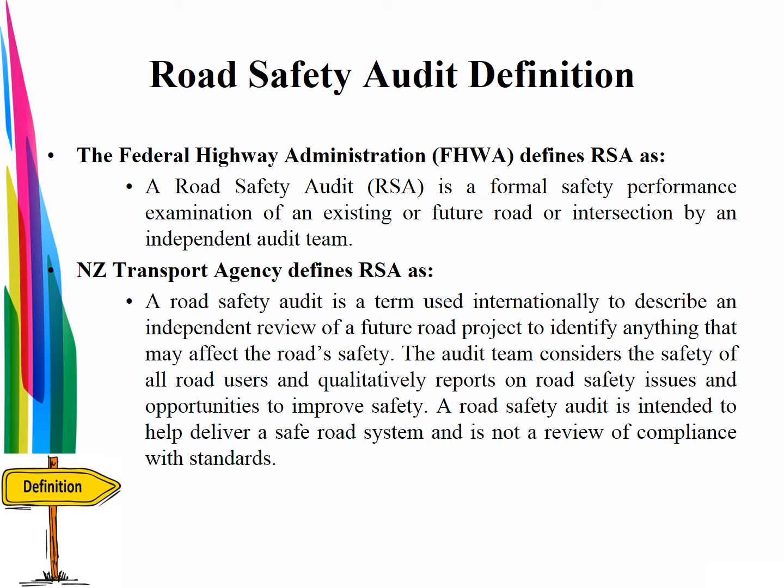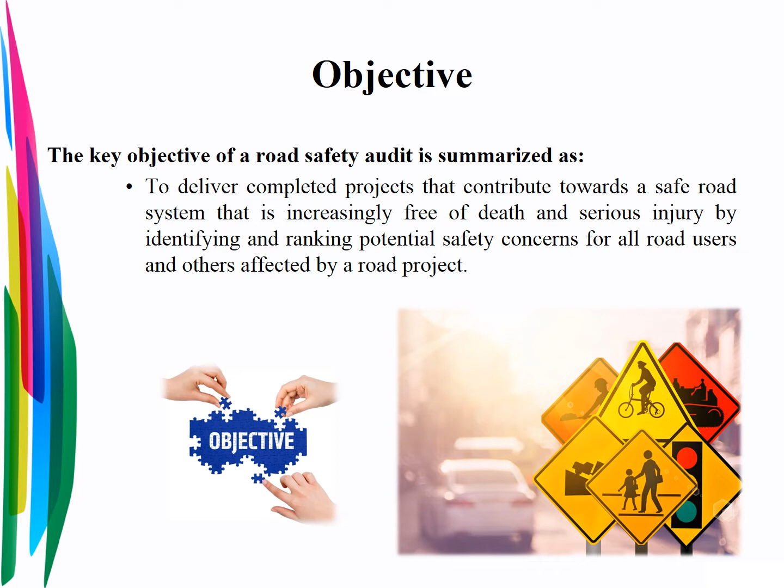So you can see in this definition it has been stressed on all road users. So all types of road user are important when you're doing an RSA. The key objective of road safety audit can be summarized as delivering completed projects that contribute towards a safe road system that is increasingly free of death and serious injury by identifying and ranking potential safety concerns for all road users and others affected by a road project.

A road safety audit is not intended to be a substitute for a quality control review, or a judgment of the quality of the project, or a compliance check with the standards and guidelines, or a design of a project, or an informal check, or a means of ranking or comparing one project or option over another.

So mainly the essential elements of road safety audits are: the audit focuses on the road safety aspects of the project, and is carried out by people who are independent of the client, which is very important, and designer or contractor, and is carried out by people with appropriate experience and training who understand the safe system approach, and is a formal documented process, and considers all potential road users, and requires a formal documented response from the client.

These are very essential elements, and without even one of these elements, we can't call it a complete road safety audit, and all of them are important to be considered when you are planning for an RSA of your project or existing road.

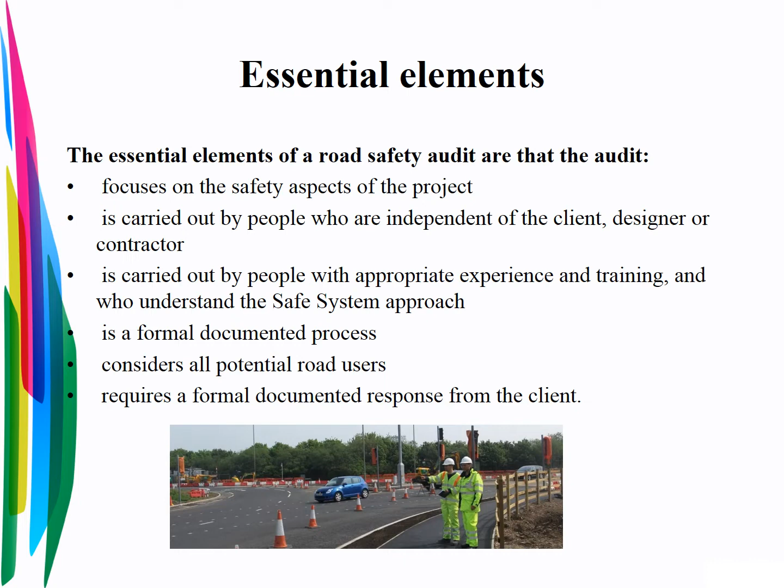The cost of a road safety audit and the consequent cost of changing a design are significantly less than the cost of remedial treatment after works have been constructed or the social cost of road crashes. It is easier to change design plans than to move or alter construction works. However, conducting post-construction road safety audits is still important, as the cost of any remedial work may well be less than the cost of crashes that may arise.

And also, well-documented experience in Europe, Australia and the USA shows that RSAs are both effective and cost-beneficial as a proactive safety improvement tool. For example, a Surrey County, United Kingdom study found that after implementation, the average number of fatal and injury crashes at project sites that were audited fell by 1.25 crashes per year, from 2 to around 0.8 crashes per year.

While the post-implementation reduction in crashes at comparable non-audited sites was only 0.26 crashes per year, from 2.6 to 2.34 crashes per year.

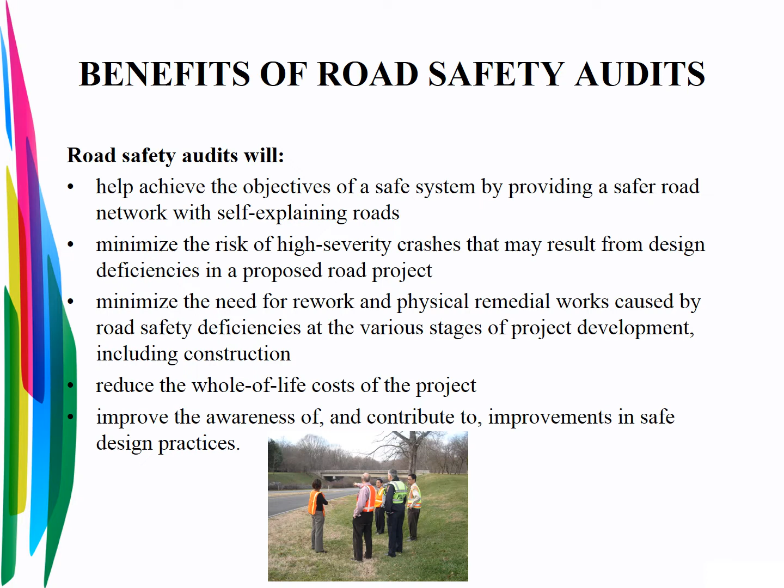So it's very important to know that there are many benefits of RSA, such as helping achieve the objective of a safe system by providing a safer road network with self-explaining roads, minimizing the risk of high severity crashes that may result from design deficiencies in a proposed road project, minimizing the need for rework and physical remedial works caused by road safety deficiencies at the various stages of project development, reducing the whole of life cost of the project, and improving awareness and contributing to improvement in safe design practice.

Road safety audits are applicable to all types of road projects and all types of roads. Projects can be as small as a pedestrian crossing, a set of road humps, or as large as a motorway. The scope of audit ranges from everything within the road corridor to specific facilities such as those for cyclists and pedestrians, and may be located within a public road, other public property, or private property. All projects can benefit from a road safety audit.

For example, major divided roads, expressways, reconstruction and realignments, intersection upgrades, pedestrian and cycle routes, as mentioned before, and temporary traffic management schemes, and local area traffic management schemes such as commercial areas, residential areas, streets and their component parts, and also intelligent transport systems, different types of ITS, and subdivision roads. So there are different types of benefits you may achieve by doing an RSA on different types of roads.

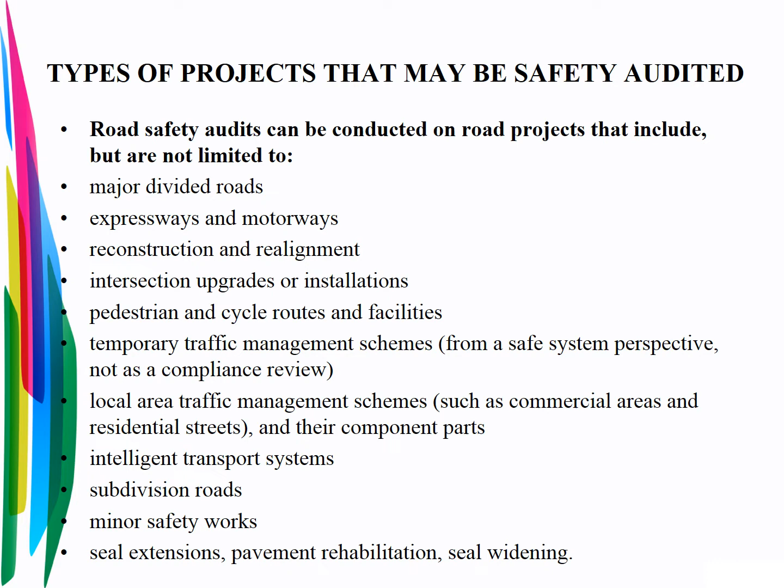After accepting that we need an RSA audit, it is also good to know when to undertake a road safety audit. There are different stages, or project milestones, such as the concept stage, which is part of a business case; the scheme or preliminary design stage, which is part of pre-implementation; the detailed design stage, which could be pre-implementation or implementation; and the pre-opening or post-construction stage. So at most stages of your road project you can undertake a road safety audit and benefit from it.

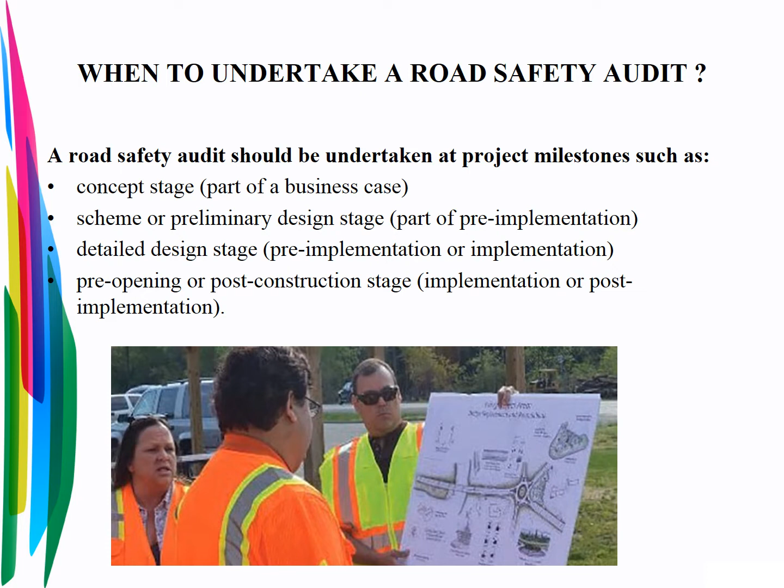These stages should not be seen as rigid, as all projects are not the same, and smaller projects will not always follow all development stages. The stages of road safety audit should match the project's complexity and actual development stages. However, the earlier an audit is undertaken, the easier and less expensive it is to make changes. So a road safety audit only at the post-construction stage should be avoided, as often it's too late to make significant improvements if required.

Also, it is recommended that each road controlling authority include the requirement for road safety audit of projects in appropriate policy documents, including but not limited to asset plans, safety management systems, and development codes. As a minimum, it is recommended that a road safety audit be undertaken at the design stage for all works within a public space. For requirements specific to a particular road controlling authority, refer to the policy of that authority.

You can see in the project development cycle we have business case, detailed pre-implementation, and for the project design cycle we have options development, concept, preliminary design, specimen or detailed design, and construction. And for project safety audit milestones, we have concept, preliminary design, detailed design, and pre-opening or post-construction. You may find in different references more or less the same, or they may have one or two more stages, but the general concept is the same: they start with the concept, and the last stage is mainly post-construction.

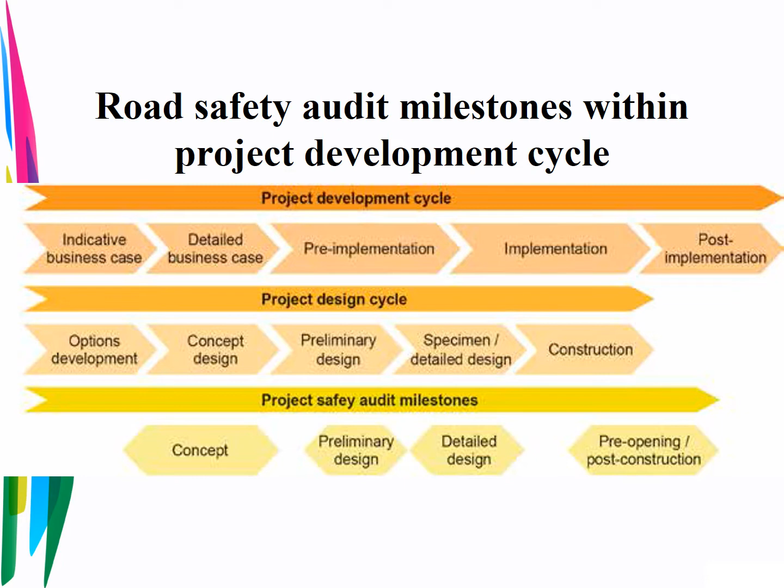Conducting RSAs and implementing their recommended safety improvements in design is estimated to typically cost 5% of engineering design fees. So it's not much compared to what may happen at the end, the costs from accidents and their social cost. So it's highly recommended to do an RSA in very early stages of your road project. As I said earlier, early in the project life cycle results in less implementation cost than later in the process, such as during detailed design or construction.

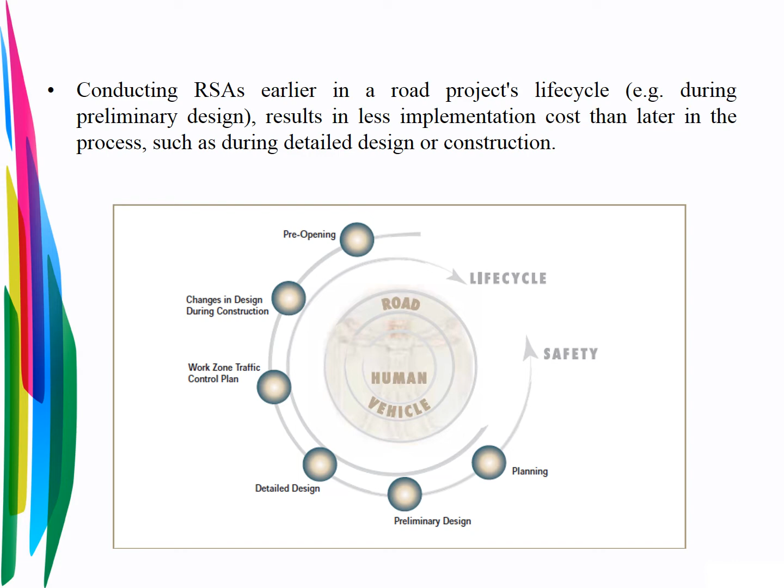You can see in this picture that for the life cycle we have planning, preliminary design, detailed design, work zone traffic plan, changes in design during construction, and pre-opening. But where possible, it's better to start safety concerns and road safety audits as early as possible.

In almost all references for road safety audit, we have these 8 steps. Step 1 is identify the project or road in service to be audited. Step 2 is select the RSA team. Third, conduct a pre-audit meeting to review the project. Step 4, perform field reviews under various conditions. The objective of project data review is to gain insight into the project or existing road, prepare for the field visit, and identify areas of safety concern.

The fifth step is conduct audit analysis and prepare a report of findings. As a result of this step, safety issues are identified and prioritized, and suggestions are made to reduce the degree of safety risk. Step 6 is present audit findings to the project owner or design team. That's very important and very useful for the continuation of the project. In this step, the audit team orally presents the key RSA findings to the project owner and design team to facilitate understanding of the findings, not only writing a report and sending it to them.

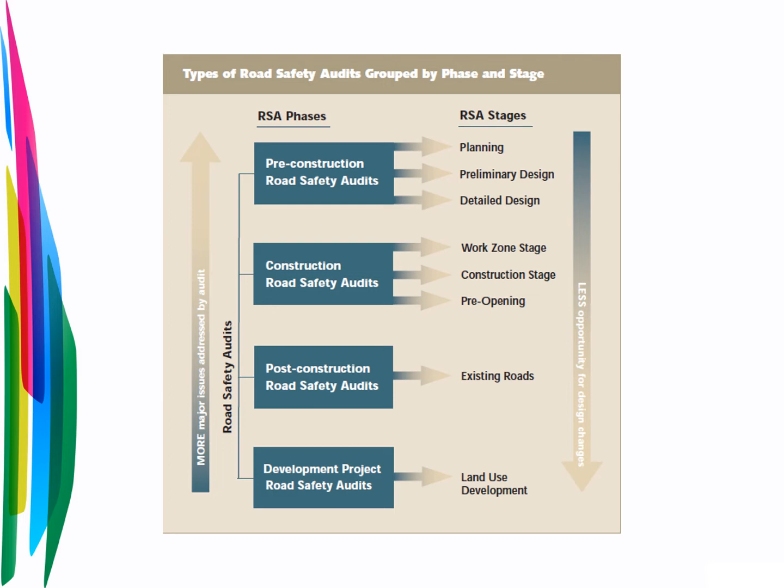RSA champions who will devote energy to driving the RSA implementation forward, and who are empowered by management to do so, are critical to getting a successful RSA program started. A top-down approach typically includes piloting RSA projects, development of formal RSA policy, and continued monitoring, refinement, and promotion of the RSA process. In general, we have different steps.

Integration of RSA as a component of a comprehensive road safety management system in a jurisdiction requires several equally important elements like management commitment and agreed-upon policy, informed project managers, an ongoing training program, and skilled auditors. So generally, a top-down strategy is recommended for introduction of RSA.

As we talked about before, we need to start the RSA with a team. But while skills in road safety engineering are the most crucial attribute, road safety audit teams should possess a balance of skills appropriate to the individual project. In some instances, a road safety audit by one person can be appropriate, but it depends on their skill and experience.

It is recommended that using a one-person team just to reduce the cost of conducting a road safety audit should be avoided. The cost of undertaking a road safety audit relative to its potential benefits and client confidence that road safety has been fully considered is considered small and hence highly cost effective.

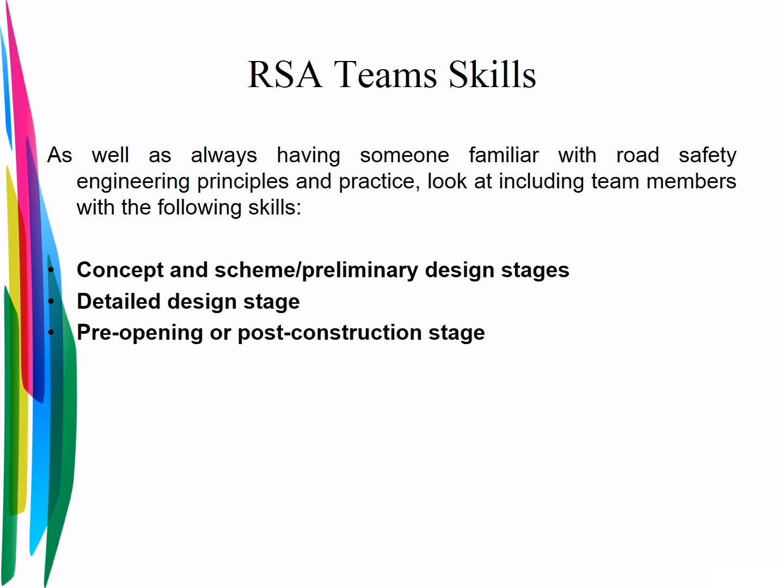So mainly, we are looking at including team members at the concept and scheme stage, preliminary design stage, detailed design stage, and pre-opening or post-construction stage. So it's very important in selecting the person to do your RSA, and very crucial to select people that are skilled and experienced in this area.

The client or designer should provide the road safety audit team with all the project information, preferably at least 1 week before the audit is undertaken. Drawings and documents appropriate to the audit and the other supporting information would normally include information on the project scope and objective, stage and scope of the road safety audit, previous audits, sponsors, client decisions, project assessment report, traffic data, crash data, and also design report or statement covering the standards adopted.

The road safety audit team should complete the necessary health and safety requirements briefing and be adequately equipped with safety vests, cameras, measuring equipment, and whatever else they will need. The inspection should include adjacent sections of road so that interface and consistency with the project are considered. Inspections should be undertaken in the range of traffic and environmental conditions likely to be expected where possible. Both nighttime and daytime inspections are desirable, with nighttime inspection being essential in the post-construction stage.

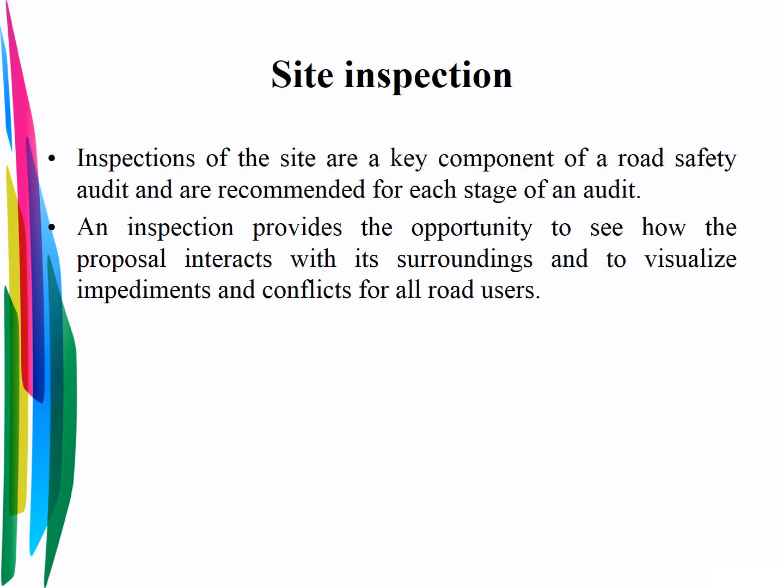After finishing the field visit, maybe the most important part of any RSA is report writing. The primary task of the road safety audit report is to report on aspects of the project which involve road safety concerns and to make recommendations about corrective actions. The road safety concerns should be listed in a logical order with a numbering system that makes them easy to refer to in follow-up reports. One way of doing this is to list the items in the order given in the appropriate checklist. Also, road safety concerns identified in the report should be sufficiently important to require action.

Issues from previous road safety audit reports that have been responded to and a decision made by the client do not need to be repeated in subsequent audits. Also, the report should not be cluttered with trivial matters. Aspects like amenity or aesthetics, which are unrelated to road safety, should not be mentioned. Likewise, traffic capacity issues should not be discussed unless they have a bearing on road safety. To help the designers and clients gauge the importance of the road safety concerns raised, a simple ranking system is desirable.